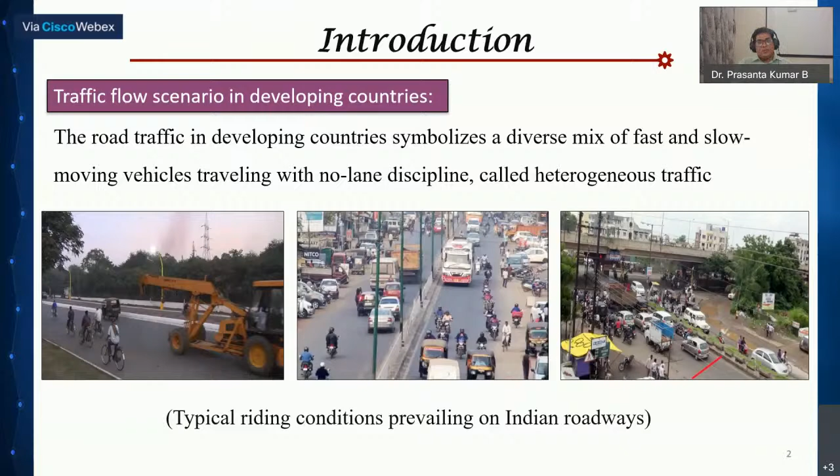So this way we will proceed one by one. The problem statement: all of you know that because of our highly heterogeneous traffic, and since we are not following lane discipline, the users, particularly the bicycle mode users, are being deprived—their service quality is not taken care of.

So we have to try to give some facility, but not at the cost of losing or decreasing any kind of service quality that the automobile mode is availing in the present scenario. That is something we should try, so that our non-motorized mode of transportation, which is a green mode, is very much required because of our lifestyle.

So there is some scope that we will get some physical exercise and at the same time less pollution. So we try to find what kind of service quality the infrastructure provides.

Again, the infrastructure are broadly of three types. One is urban street mid-block sections, one is signalized intersection, and another is unsignalized intersection. So broadly, three facilities we are considering.

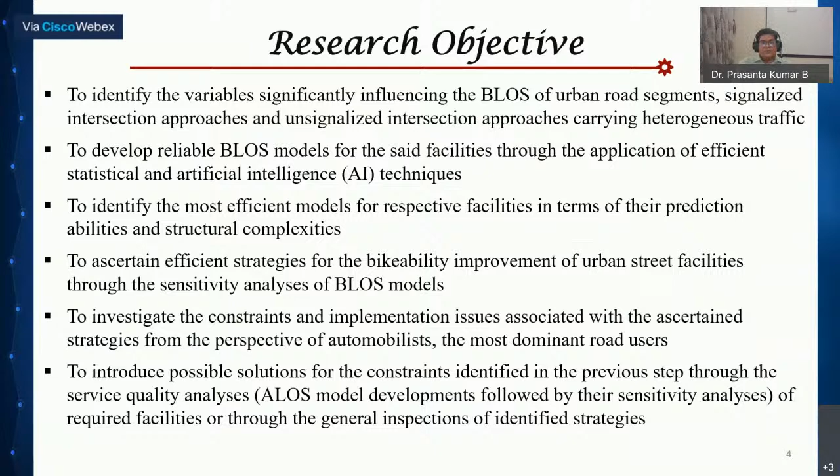Several cities are there, then we have to select some cities. Based on what criteria we are selecting some cities, what kind of variability—those things depend on us. We have to select the cities; it can be metropolitan cities or mid-sized cities, or in some case it can be mixed up. Then we have to judiciously take the decision from which city we should take the data.

Next level, we have to identify the variables, because there are several variables you can find from literature, and then finally we have to select some of the important variables. If you take too large a number of variables, it will become very difficult to manage in your modeling process. So that's why we have to apply some statistical technique and limit the number of variables to 5, 6, 7, whatever we can control, or variables having significant contribution.

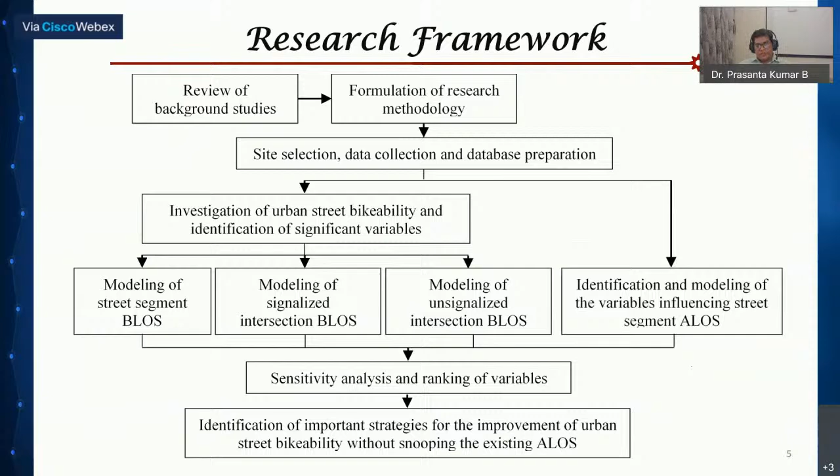Broadly, we are discussing two types of tools. One is statistical tools, under which stepwise regression, ordered probit, ordered logit. Then under artificial intelligence tools: genetic programming, multi-gene genetic programming, functional network, then BRNN—Bayesian regularization neural network. Many others are there, but we have discussed this much.

Some of the very popular techniques in the recent past—all these AI tools are being used in transportation problems, along with other statistical tools that are traditionally used. Then we will see which method or tool is giving better results. We can give some comparative statement or comparison, that we'll see.

So regarding the study area, in fact, collecting data in India is always very difficult. So we have taken data from several cities, considering different Indian cities, different parts of the city, then diversity in the geographical properties, traffic characteristics, and roadside developments. The purpose is to include much more diversification in their characteristics in terms of geometric, traffic, etc.

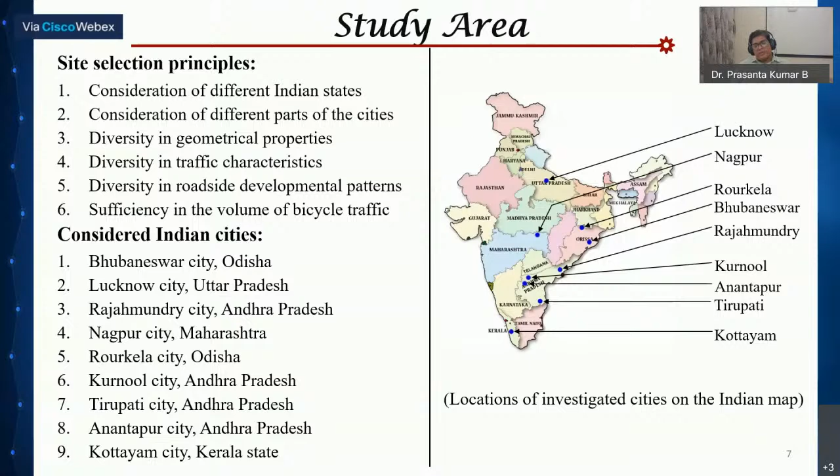Weather condition, and again, when you are an academic researcher, you have restricted time period on that particular time period, preferably on the working days, peak hours, data are being collected in different time periods.

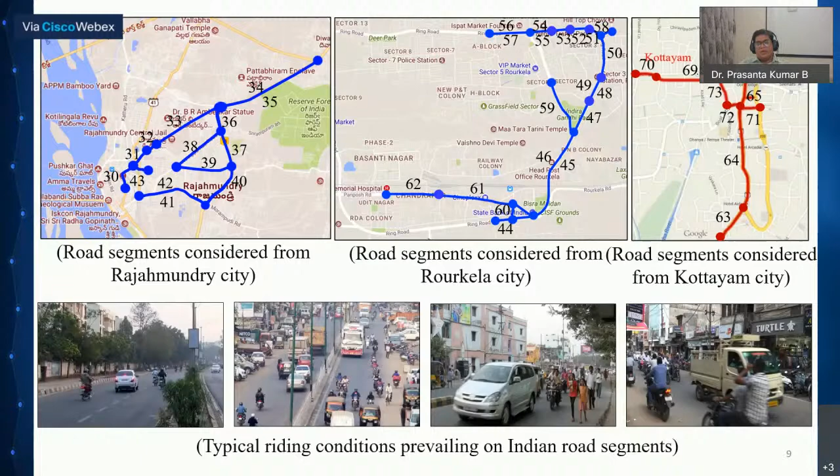And we require some high resolution video camera, measuring tape. Nowadays, you have different ways - without measuring tape, you can also measure the distance. Laser meters are there. And of course, through this video camera, you can get the traffic operational data, then geometric data we can measure using the measuring tape.

Similarly, the built environment and other data that we have to take from the field investigation, their perceived satisfaction level of the user. The users are, of course, your bicyclist or automobile users, depending on the mode on which we are collecting the data sets. This is another challenging aspect, getting perception of the users there in the field itself. That's why it is more accurate, because the users have their feeling, they express in the moment.

The other way, we can do the same thing through Google Form. We can send to several users, or there is another technique - we can take small video clips and display at some, say, AV hall or some common room where many other users, maybe your friends, can view them, so that you give them the questionnaires, and they go on filling the questionnaire, looking at the different video clips, in different ways. This perceived perception method is being applied elsewhere also.

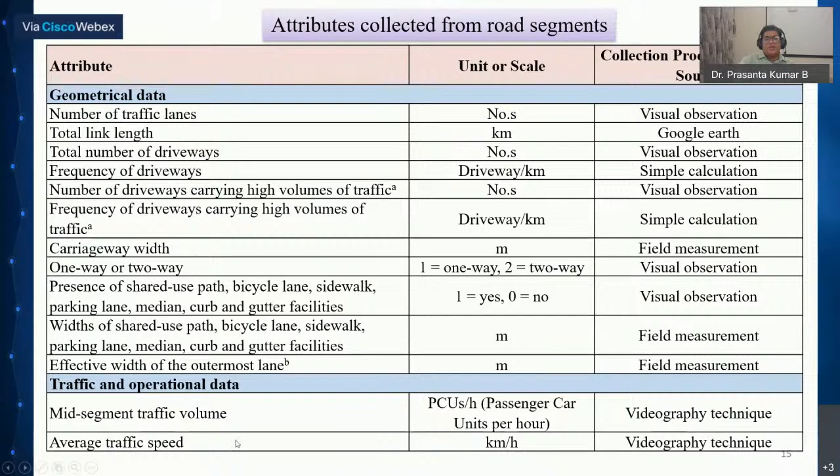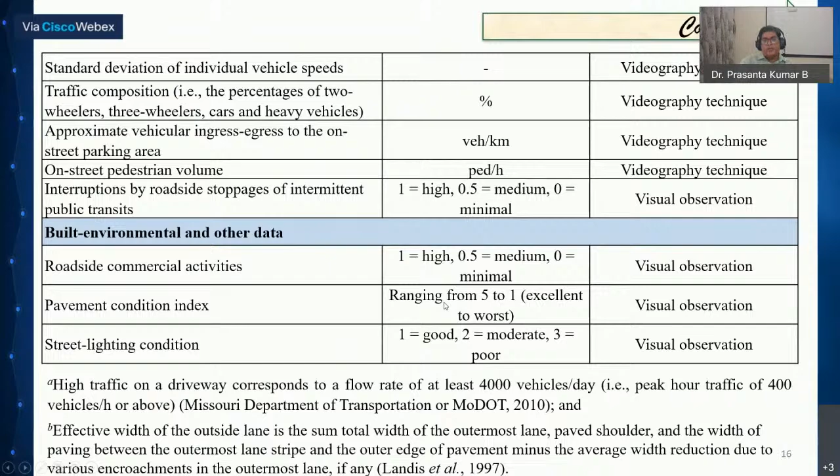Similarly, traffic operation data - mid-segment traffic volume, average traffic speed, standard deviation of vehicular speed, etc. Built environment data like roadside commercial activities, pavement condition index, street lighting, etc. So the data sets that are taken - how we have got these variables - of course literature helps, and when you are conducting the pilot survey, that is, first time survey, then you have got the first impression. Then only we can have our final questionnaire design, and those variables we have to measure in the field.

So likewise for signalized and unsignalized intersections, of course there will be some difference in the data variables - it is not the same. And this extensive data collection, variable selection, really strengthens our in-depth analysis.

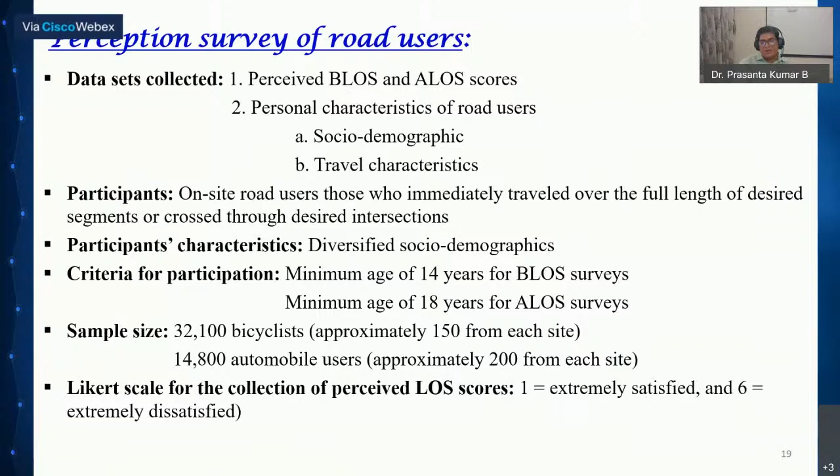And there is some erroneous form of data that we can eliminate. Sometimes we also take help of mirroring. If you are having very less data sets, there is some technique we can use to increase the data points, and the data points have to increase - I mean, has to be significant. So there are some techniques or mathematical expressions using which we can say whether our data sets have a good number of data points for the purpose or not. Statistically, we can satisfy that - very simple formulas are there.

Now we can proceed a little bit faster. This service quality - all of you know that on any facility, we are concentrating here on road facilities, particularly mid-block sections, signalized or unsignalized intersections, and some mode-wise facilities. For all different cases, this range will vary.

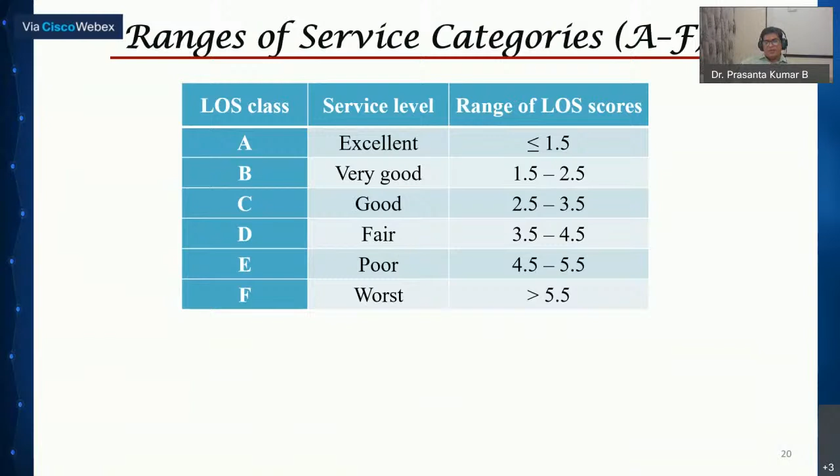Conventionally, this is taken as a variation from 1 to 6. Normally, A is the best quality of service, F is the very worst, not so good kind of service, and average is C. So for any infrastructure, we always try to maintain at least a C kind of service. Better would be B or A, but practically it is very difficult. In India, population density is very high, so that's why practically it may not be possible. But if the service quality is deteriorating, going towards D, E like that, then we try to take some action.

Road segments, that is from after one junction to next junction. Likewise, here for this bicycle level of service modeling, you have 8 variables. Initially it may be 15-20 variables. Because of this, using Spearman's test, correlation analysis, p-value analysis, all of you know, we can say which variable should be taken into consideration and which variable should not be. That is the first step of our modeling.

Now, data processing. All of you know that when you are developing some model, you have to validate it. So to validate your model, you keep some data aside, 30% of the total, that will be useful later on. So in most of the modeling cases, when you are using only 70% of the data, we require more data.

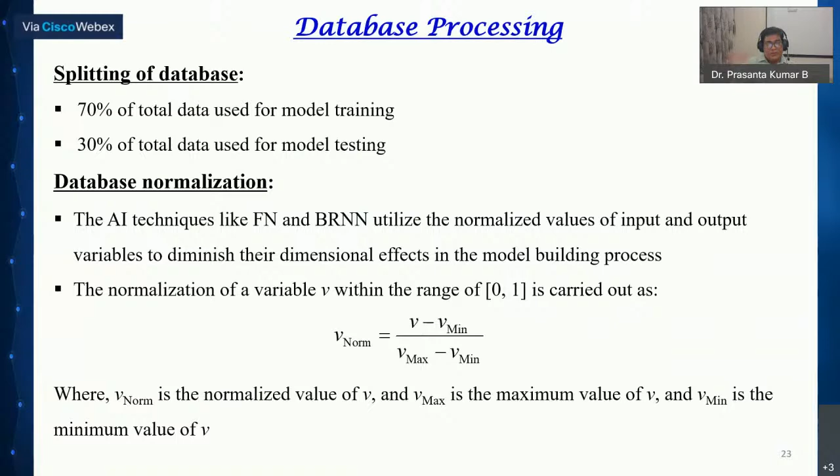This is our contribution, the modified rank index. All of you know that when doing some kind of modeling exercise, you apply some error estimation techniques. This is something called best fit calculation, R square value - this is what we have taken as R1. This is our contribution totally, called MRI, modified rank index method. Normally we see all these are available, then we try to combine them together and develop this MRI method.

R2 is error measuring using average absolute error and maximum absolute error methods - likewise, a well established method. Similarly R3, I'm not going into more depth, but you can have a look at it. And if you want to know more, you can email me - my email ID is there on top.

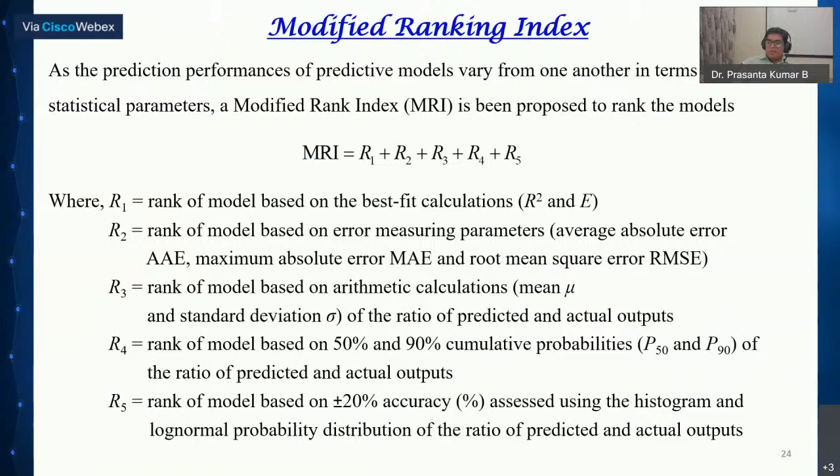R4, R5 - then what we do, suppose for regression based model, ordered probit model, ordered logit model - these are statistical techniques. Again you have GP, MGGP, FN, BRNN - 6, 7 methods - you have applied all these. Now, how can you know which method is better, or best, or worst? So then we do training and testing, 70%, 30%.

Then we try to find the best fit calculation, error measuring parameters R1, R2, R3, R4, likewise. Then in the first error estimation technique, suppose we have applied 7 methods. Based on those outputs, we can rank them - this is the best one, suppose the FN method using this error method. Similarly for the second error measuring method, in all these cases, I think it is the FN method.

So when all of them equal 1, 1, 1, 1, the summation is 5. That's why the functional network method is the best method in terms of error estimation. The second best is MGGP, multi-gene genetic programming method, and third is the genetic programming method.

You know that the regression method, which is so popular and most user friendly, we love to use those kinds of models. But in terms of prediction or error estimation, it is not performing so well. That's why people are going after these artificial intelligence or machine learning approaches.

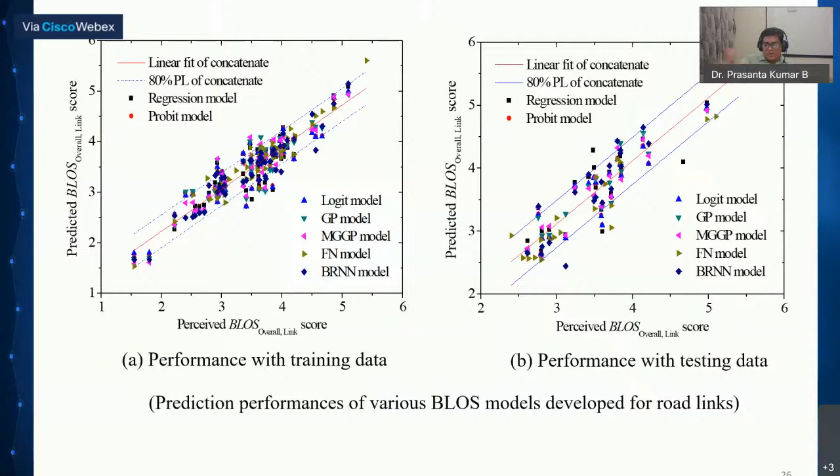Now the model fitting part, we have to fit our equation. Always the regression based equations are more popular. Under regression based methods, we have linear based and non-linear based equations we can develop. Our experience says that non-linear based models are difficult to establish, but they give much better prediction than linear models. The R square value you'll get is better, and you will get more appreciation in your research or paper. So we should try both, then only we can say which is giving better result.

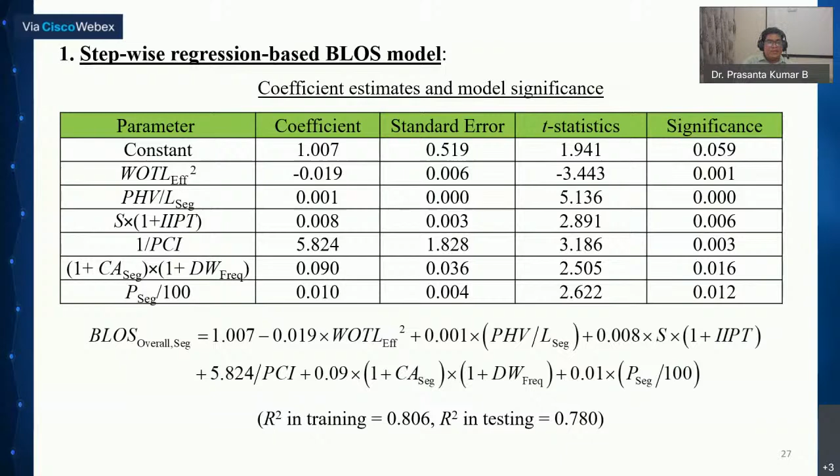For this, we have to do a lot of trial and error, but finally we get some good models. In similar form, this MGGP and so many other techniques are developed under MATLAB based computational techniques. Nowadays, some other techniques are also available. For that, we require this algorithm, population size—it has variation—this to this number of generations, etc.

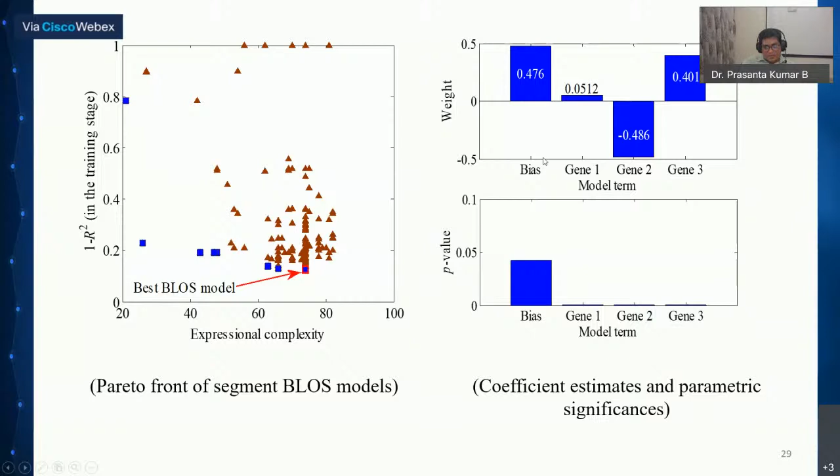So what finally we have followed here is these things. The important thing in this method is establishing the weightage. In our particular case, the number of genes can be decided, and that decision depends on the R square value where you are getting the maximum. Accordingly, we have selected 3, and the coefficients we have got are utilized here. Coefficient W0 is utilized here, and the remaining W1 weightage factor for gene 1, gene 2, weightage factor 3 for gene 3. These things have to be calculated.

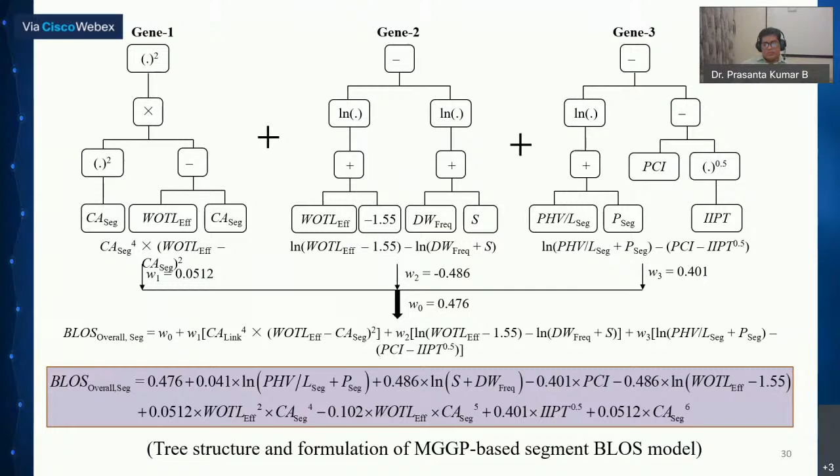And those calculated values are somewhere here, 0.041, 0.486, likewise. Of course, variables are ours only, depending on the type of problem we are tackling—transportation, mechanical, or whatever structure. Overall, this equation seems to be more complex. Any normal user in the field will fear to use your equation. Its prediction efficiency is very high, but the question mark is on usability, how the users take your model or output.

Similarly, this is the functional network based BLOS model. The shape function SF is being considered for polynomial, exponential, and other forms. In that case, the maximum R square value we found is about polynomial, and that is considered based on the variables we are considering. We are trying to establish some equation, and it is so complex.

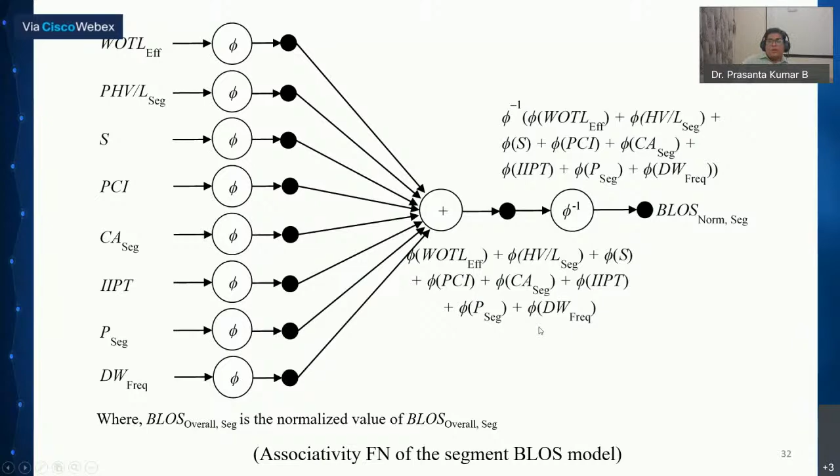So this is something about one mode of transportation. We are talking about bicycle. Under bicycle mode, we are considering mid-block or segment type, and other junction types. Similarly, we can develop such kind of very complex equations. Once you know the technique, now it is simple—like this automobile level of service model.

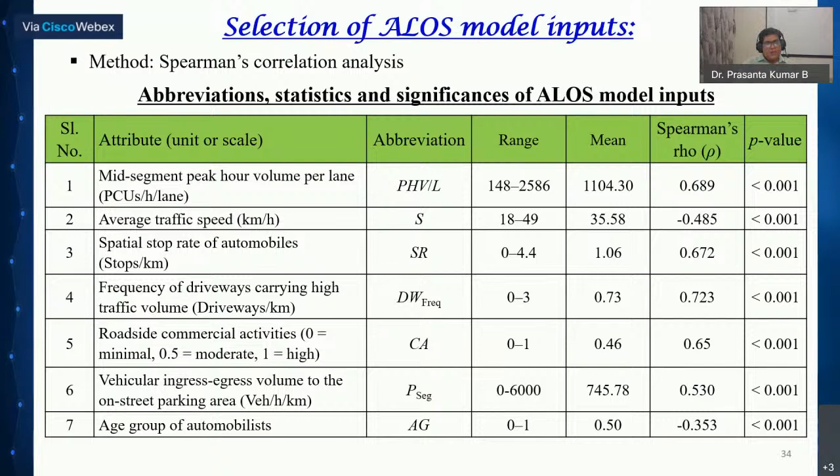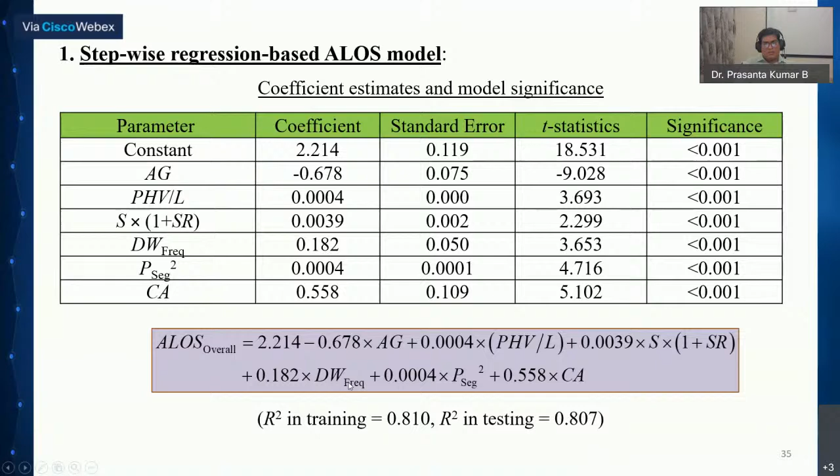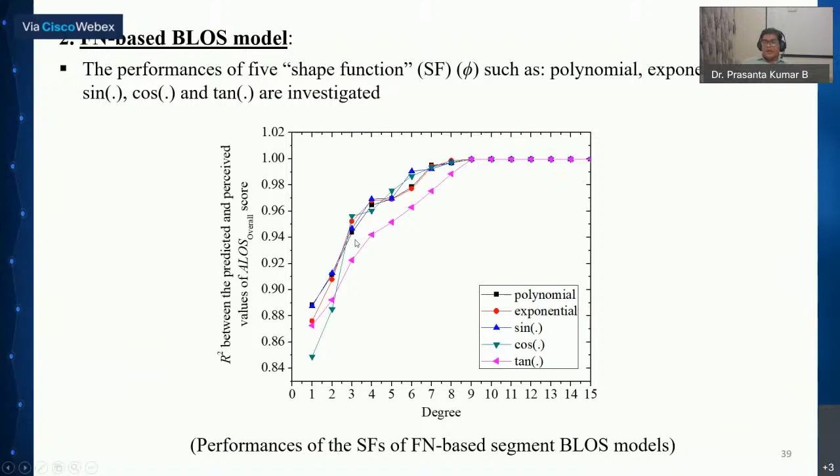I think things are mostly repetitive to what we discussed so far. Only thing is there will be some variation in the variables we are considering. Remaining, the equation looks a little bit different, but overall the approach is the same. Similarly, the MGGP LOS model, and the functional network based LOS model—our target in the beginning is to get, assess, or predict bicycle service quality.

The bicycle service quality here in India, whatever we are getting, is purely on shared path. Hardly will you find any bicycle lane facility. In some Western countries, you will find exclusive bicycle lanes. Some pedestrian lanes are there. Sometimes unwanted bicyclists use pedestrian paths, but that is a separate issue. And whatever we have done here is purely on shared path.

The shared path—if you see the lane-wise utilization, the innermost lanes are normally utilized by high speed vehicles, preferably car traffic. Next to that is heavy vehicles, truck traffic, bus, etc. And the outermost lane, or we say curb lane.

Close to our footpath, you will find much hindrance from vendors, encroachments - our Indian scenario - stray dogs, signboards, advertisement boards. So the vehicle normally travels at slow speed, and on that, bicyclists share the space, and that's why we have considered that as the case.

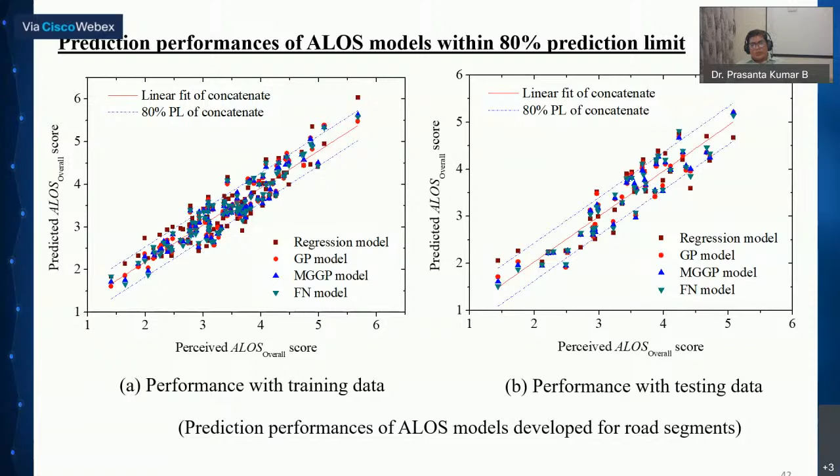Similarly in this case, for ALOS model we try to find the error - regression based, MGGP, and FN - depending on how many models we are developing and comparing. Here, perhaps MGGP is showing better results.

So the question now is, when developing such a model, we have to check its prediction efficiency. How can we check this? One is our own model - again, models are of different types we have developed.

In that model there are many types of variables. If you give those variable values as input, you get the output. That output is some score, and you can define its ranges as A, B, C, D, F - so finally you get this A, B, C, D, F, Likert scale 1 to 6.

I know these alphanumeric values show where we stand at the present scenario, field observation, and our model prediction. Both we are trying to match them. The question is how to know the field observation.

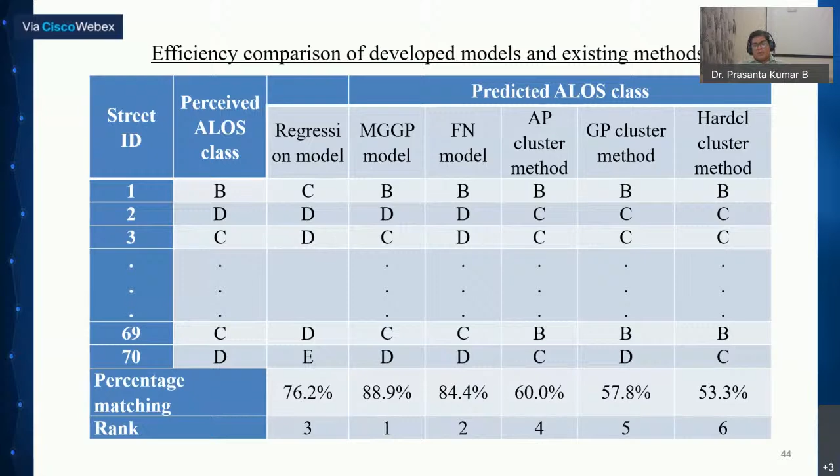Now this is perhaps close to the last part of our discussion: sensitivity analysis. This summarizes the whole modeling process we have discussed. We have taken some variables, restricted some, eliminated some through statistical tests. Once we take some variables, we try to fit an equation or model.

Once you have several models, you go through training and testing phases. Then the model is fitted, and we can check the observed versus predicted values - how much they are matching or not. Then once you know which model is best for you, say for any kind of facility -

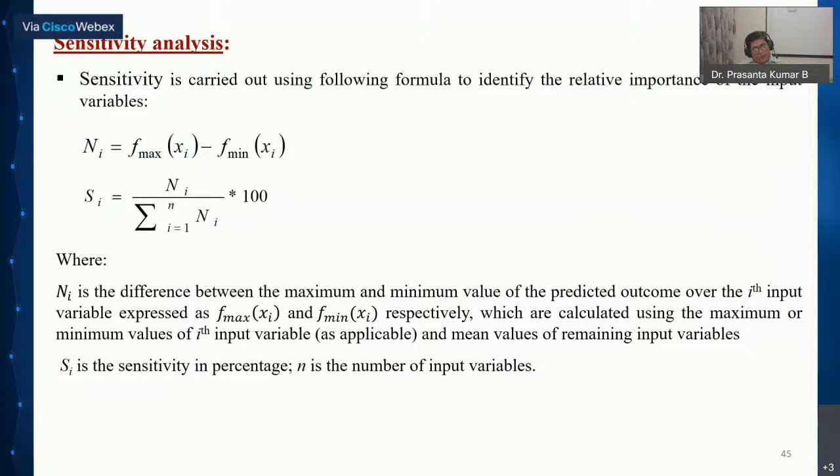maybe segment, signalized, or unsignalized facility - then our job is to know further through sensitivity analysis, because the number of variables are already fixed. Among those, we have to see which variable is contributing the maximum.

No, in this case it is 100 - it should be 100. In the previous case, when you're eliminating some variables, there will be a little bit of difference.

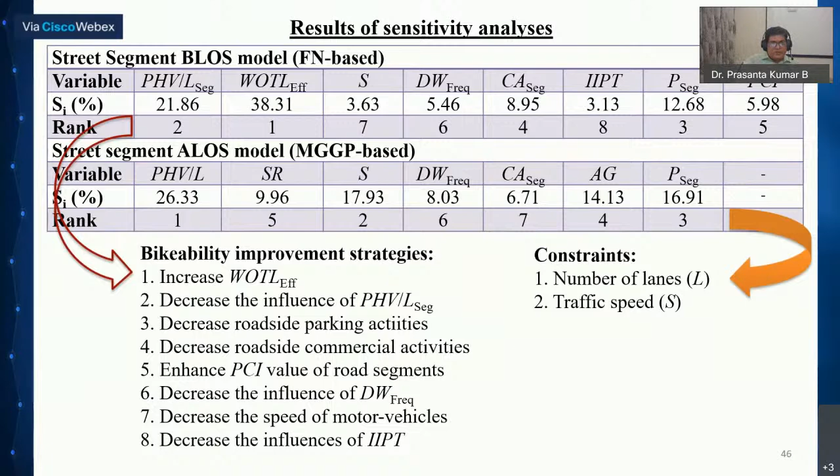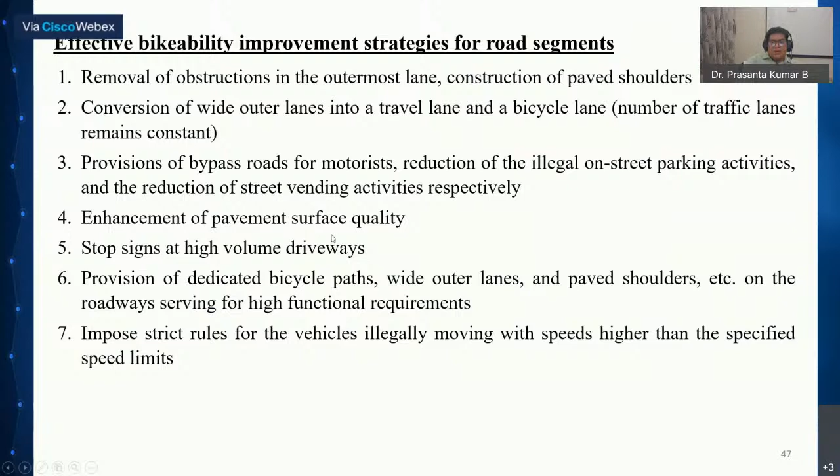These are the effective bikeability improvement strategies. We can look at the literature to see how we can express those things: removal of obstruction in the outermost lane, conversion of wide outer lane into travel lane, provision of bypass road for motorists, enhancement of pavement surface quality, stop signs at high volume driveways, etc. These kind of strong recommendations we can give.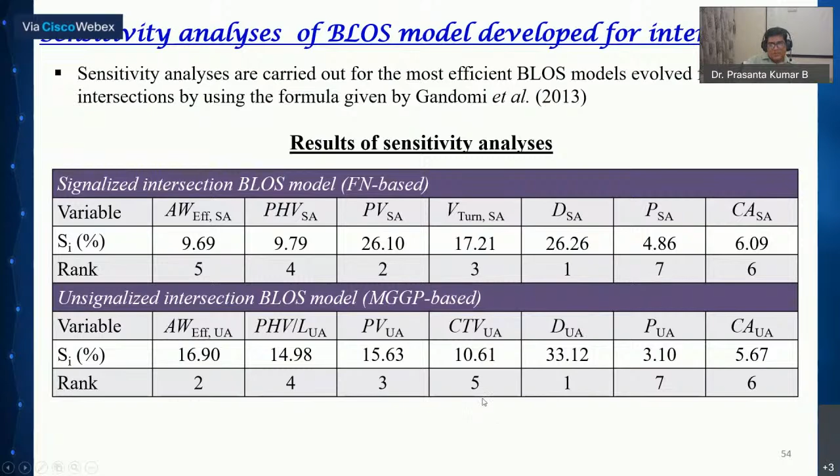This is all about junctions. These are simply repetitive things, we can have a look. Again, sensitivity analysis for junctions, we can see which one is influencing the maximum, and yeah, the variables are different.

Then we can say improvement strategies like the other facility. Here also, for signalized as well as unsignalized intersections, we can do something. In some cases, minimization of bicycle delay, that's the step we can take here: effective traffic management, proper signal coordination, separate bicycle signals. Most of the cases we don't find bicycle signals, minimization of influence from crossing pedestrians, turning vehicles, traffic flows, and the subject approach, etc. So we can do something.

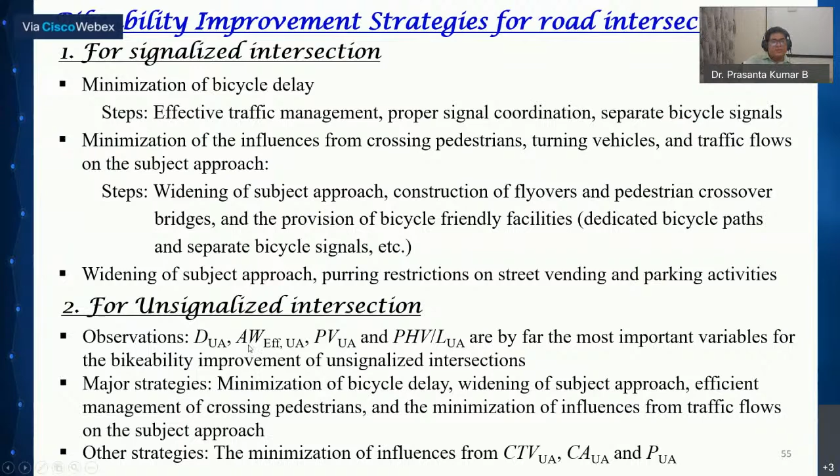So in summary, what we have discussed: the data sets have to be sufficient, with wide variation from different cities, different geometry conditions, traffic conditions, and that is better—your model becomes stronger. This is one difficult part in India. We have less automated data collection systems. We are reluctant to share our data sets, but still there is a lot of scope we can do on data automation and implementation. In fact, sometimes we are reluctant, but that way the research quality, the output, data quality will enhance significantly.

The tools, whether it's a regression based tool or AI based tool, all are available. The only thing is that we have to go forward and apply them. Perhaps India is very good in applying all these tools. So the only difficulty so far is about quality data sets and sharing of information or data sets. Then the whole thing will become very good for us. Now, of course, another difficulty is about application—how quickly you are applying your research output.

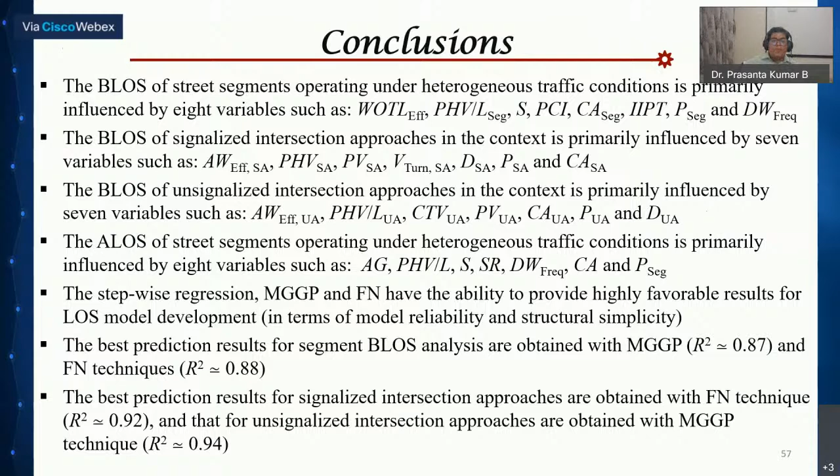Now, conclusions are complex, and for B-LOS, some variables which are contributing or influencing significantly at signalized mid-block sections are identified. Similarly, for A-LOS, variables are identified, different techniques are applied which give the maximum R-square value, and those things are also identified. So we can strongly say this MGGP based model is good for B-LOS prediction, say for segments like that. And improvement strategies we have in our hand, so we can go accordingly—that will give you the best result from the research, meticulous research with so much time.

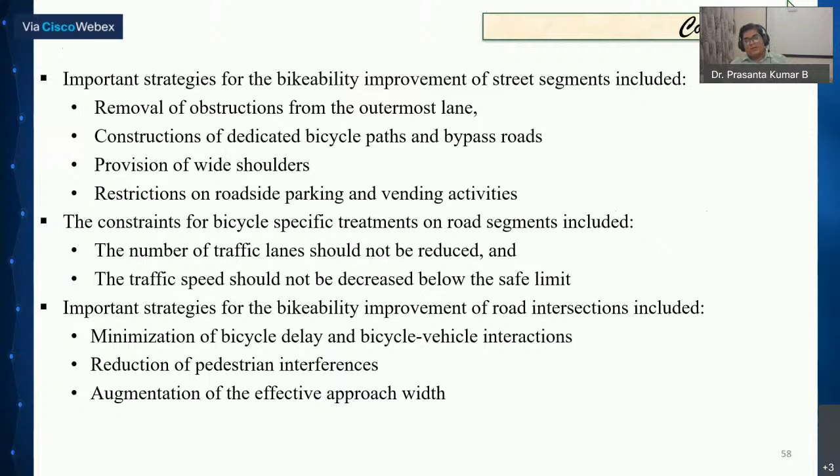I mean, others—ours is a developing country, so research is definitely a costly affair. Of course, over time, we are spending more and more money on this. And so we hope our road system, traffic management, which has an implication in transportation planning, and not only planning but also in the maintenance systems—because maintenance systems are also very much linked with our traffic flow.

So the whole exercise of doing this is only to have a very good, high quality road system, transportation mobility system, very good information system to the end users, so that we can optimally use our resources and get the best service quality. That's why we are estimating the service quality, we are predicting the service quality.

So the service quality concept is well established in the US. They started in 1950 in the form of the Highway Capacity Manual, and in India recently we have our Indo-HCM, but we have a long way to go—very extensive, comprehensive capacity manuals, service quality manuals, and all these things.

We should not only do it once, but at intervals we should include more and more latest techniques, so that our system will be much better. So thank you for listening very patiently, and perhaps this topic is interesting for all of us, so that way I stop here.

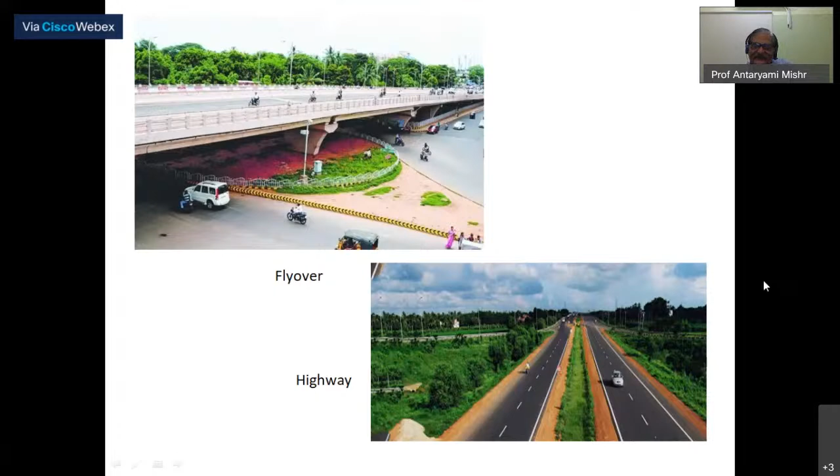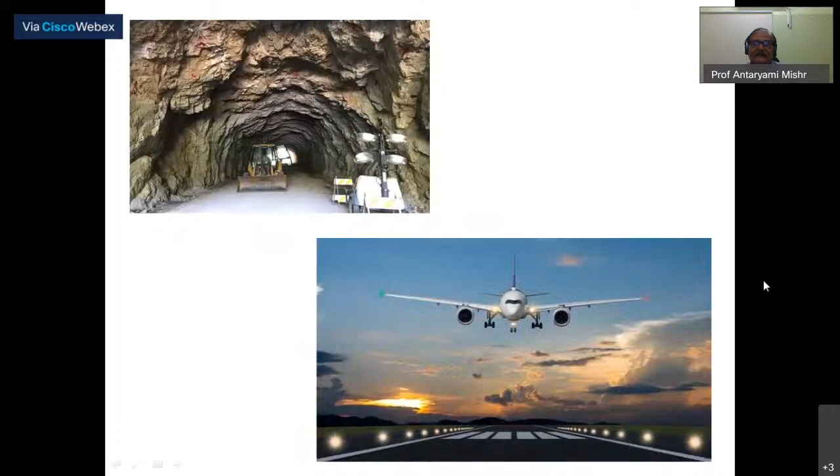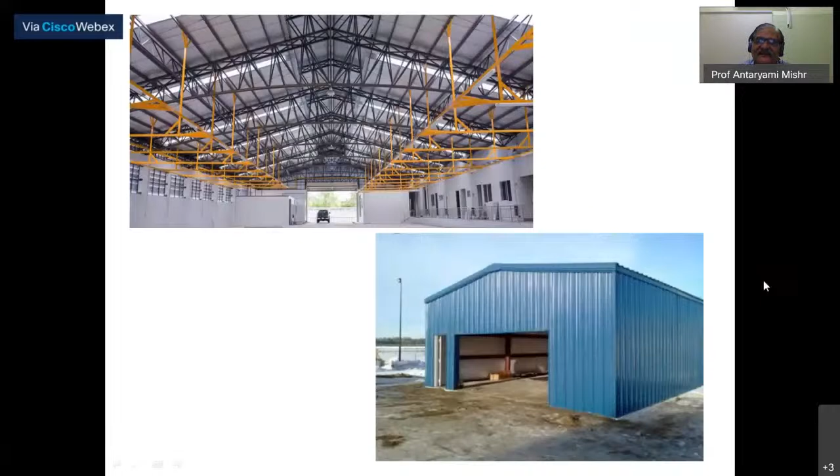And this is a roof truss, which has been designed for providing industrial sheds. And the last one I have shown is a ready-made house. You might have seen that the Tata group of companies are now providing vending zones, small shops, and also habitable houses, some small cabins, on a ready-made basis. It's available, and you will find that a house is being made within 2 days, or maybe sometimes within 1 day, and that is because of automation.

I mean to say, I can say jokingly that the robot becomes a second wife. If you are married, fine, it becomes a second wife. If you are not married, then it becomes your wife, who will give you a steaming cup of tea in the morning after getting up from bed.

All of you understand that this type of work is done through manual labor, which takes considerable time, including transportation and other things. Hard labor is necessary, and safety is not taken into consideration. This is the traditional way we construct houses. But it is still in use in our rural areas and also in our urban areas in India. We have not completely eradicated this.

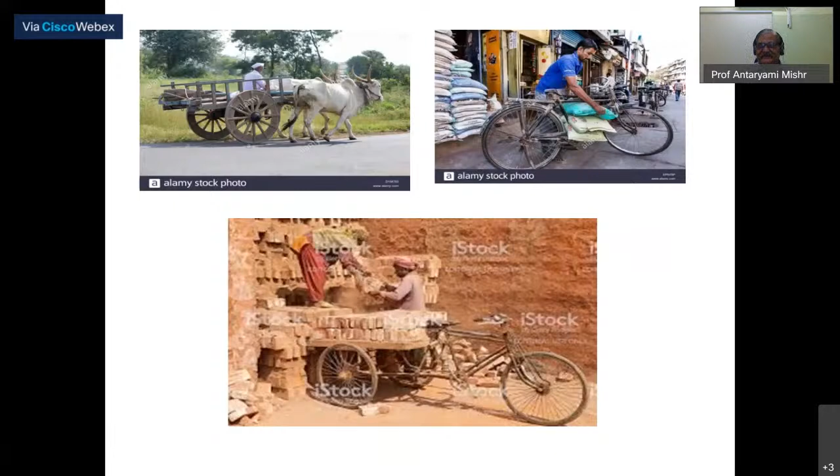We have utilized all those traditional ways and we are still using them in rural, urban, and semi-urban areas. But automation is necessary because when the job is totally repetitive in nature, it is too time consuming and dangerous. If you are working on a skyscraper, you have to climb up to 100 or 200 feet. If it is a 21 story building, maybe 200 feet. If it is a 10 story building, around 100 feet or so. So the working environment becomes dangerous.

As a result, safety of workers is not taken into consideration. Similarly, cost control: I have already given you the example of laying railway tracks, and reasons may be plenty, but there is no control on the cost overrun. Increased efficiency is necessary, and the construction industry is not an exception to this. So the excellent solution for this is that operational efficiency has to be increased and cost has to be controlled.

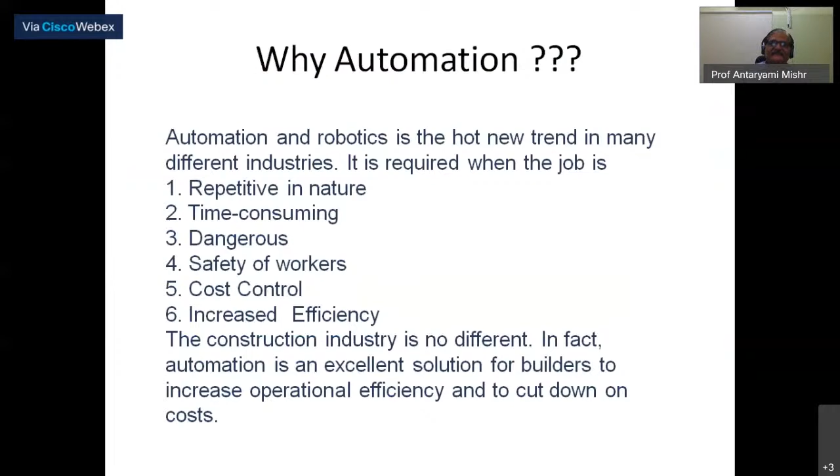Need for construction automation and its benefits: the scope of construction automation is wide and involves the entire construction stages. For instance, construction materials for civil engineering include sand, asphalt, aggregates, cement, water, and iron as a reinforcing agent, or if it is a composite material, other fibers and reinforcing agents are essential. So construction material production - how rapidly can we produce it, that's why automation is necessary, and how accurately can you produce it.

Sometimes prefabrication of construction components is also necessary. You might have seen nowadays that pre-stressed concrete or precast concrete is available, due to which it takes less time for constructing a flyover, a bridge, or laying down railway tracks. On-site construction is also very important, and so many challenges are there in on-site construction.

And operation - after construction, people forget the operation and maintenance of buildings. Last but not the least is the demolition and recycling of structures. For demolishing a single-story building of 2 to 3 rooms, we may take 1 month, but nowadays it is becoming easier because of the equipment available. But after that, how do we recycle these things? Otherwise there will be environmental impact. That's why automation is necessary.

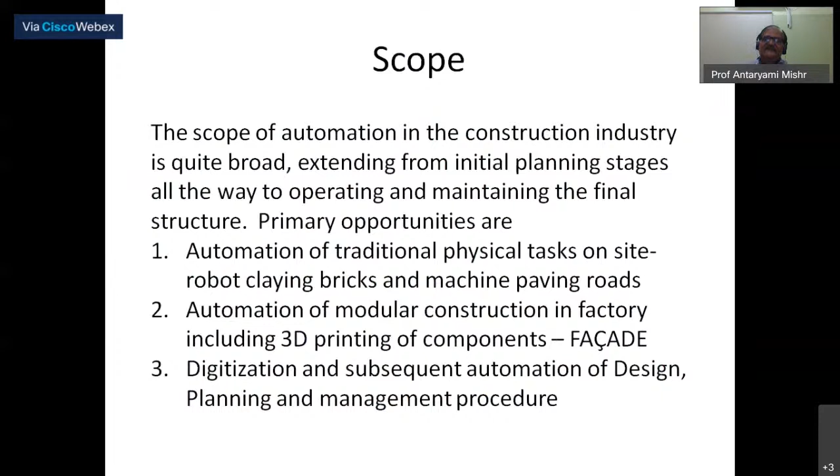Earlier, we would do the survey and then create a contour map to see at different heights whether the road was leveled or not, or where to construct a road. That traditional way took considerable time. But now people are doing it with drone cameras, which are also used in defense, military activities, research, and other fields. So what is the Indian scenario?

In the Indian scenario, our Honorable Prime Minister talks about Make in India and smart cities. Around 2016, he declared that 100 cities would be designated as smart cities. In Odisha, there are two: Bhubaneswar and Rourkela. These are assets for economic growth as far as infrastructural projects are concerned.

Under the Make in India scheme, $650 billion investment has been made for the infrastructure sector alone. Urban infrastructure is inadequate to meet the demands of the existing urban population, because there is migration of people from rural to urban areas. Most people are interested in migrating to a city, whether from Dhenkanal, Kalahandi, Baleshwar, Berhampur, or even Puri to Bhubaneswar. Everyone wants to stay in the capital city, which is otherwise a smart city, so they get all facilities.

But I remember that when Dr. APJ Abdul Kalam was President of India, he talked about the PURA scheme, Providing Urban Amenities in Rural Areas. That scheme was meant to develop infrastructure in rural areas so we can check the regional imbalances of east, west, north, and south India, and provide all facilities at the doorstep in rural areas as well. What facilities are available in urban areas?

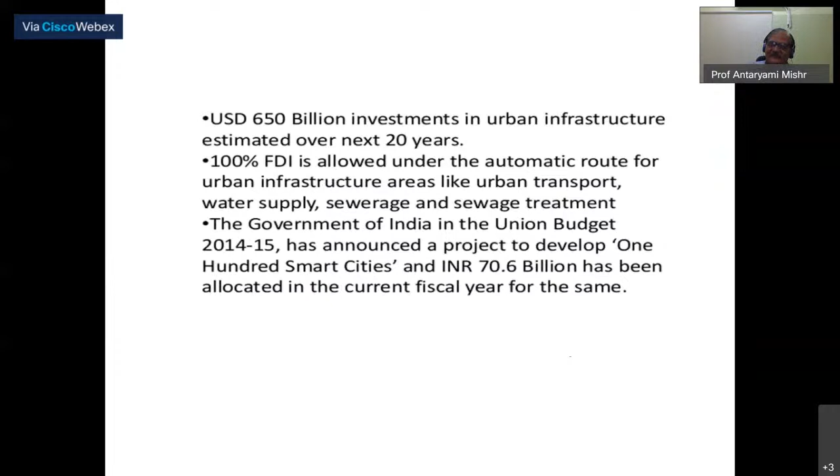So what are the areas of automation in construction? Those are roads and runways, structures, building construction, ports, tunnels, factories, and industries. Engineering automation starts from survey automation, design automation, construction automation. In construction automation, there is inspection, position automation, site monitoring, and machine automation. These are the 4 steps in construction.

Usually in automation, survey automation, that I have already given you the example. Now people are talking about survey with the help of drones.

But apart from that, now the concept has come to adapt virtual reality and augmented reality. Virtual reality is the simulation of a real-time situation, or what is happening in the field, so that prior to its execution, you can see what hurdles you are going to face and you can eradicate it.

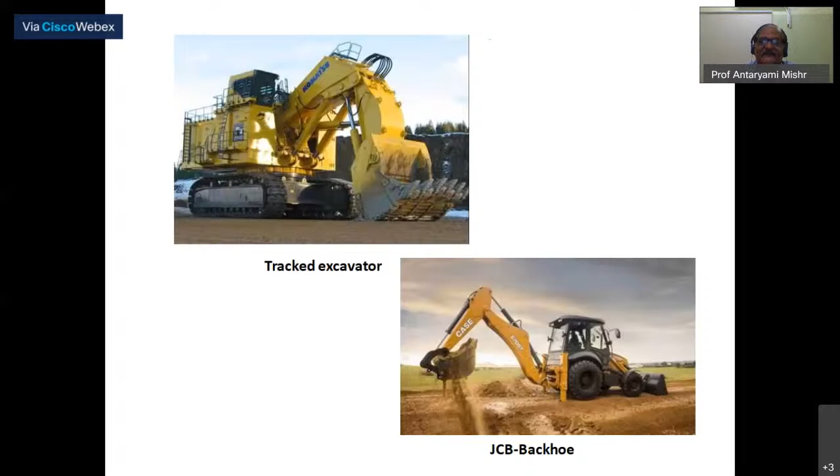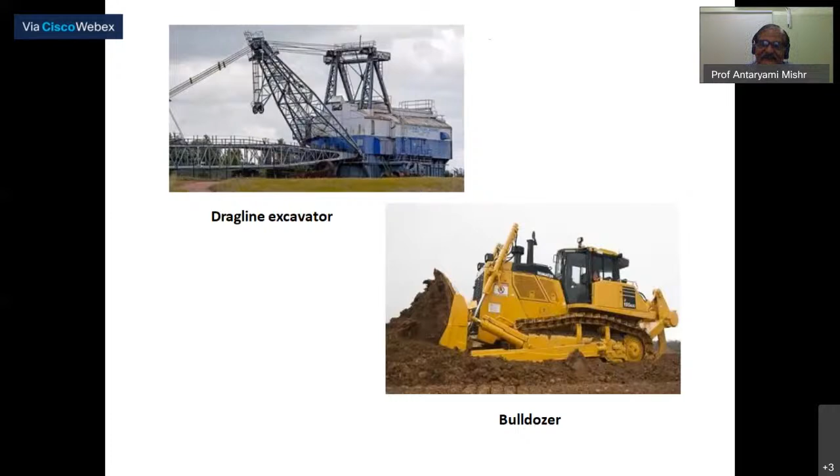See, there is a tracked excavator and a JCB which is a backhoe - how it works you can see from the pictures. Dragline excavators are mostly used in collieries and coal handling plants and others. Bulldozers - all of us have seen how they work. Motor graders are also available, as you can see from the picture. Wheel tractor scrapers are also available for scraping purposes.

Especially the earthwork or preliminary work that has to be done before making a road or construction of a building or anything, wheeled trenchers are nowadays available, so long trenches with specified depth can be made.

And tower cranes are used. Those who have visited Bombay, Mumbai, Delhi, or Calcutta, Madras, they might have seen tower cranes are mostly used in multi-story buildings.

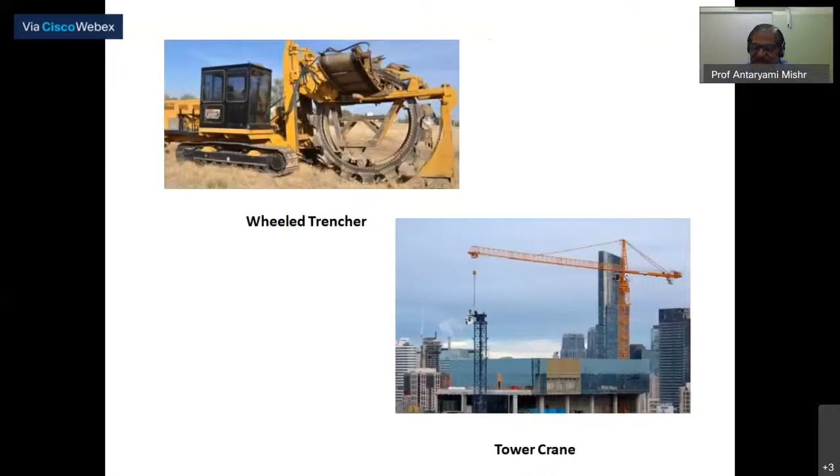And smooth wheel compactors that I have shown you, it is used. Feller bunchers, a lot of road materials can be taken as a bunch and kept as material handling equipment.

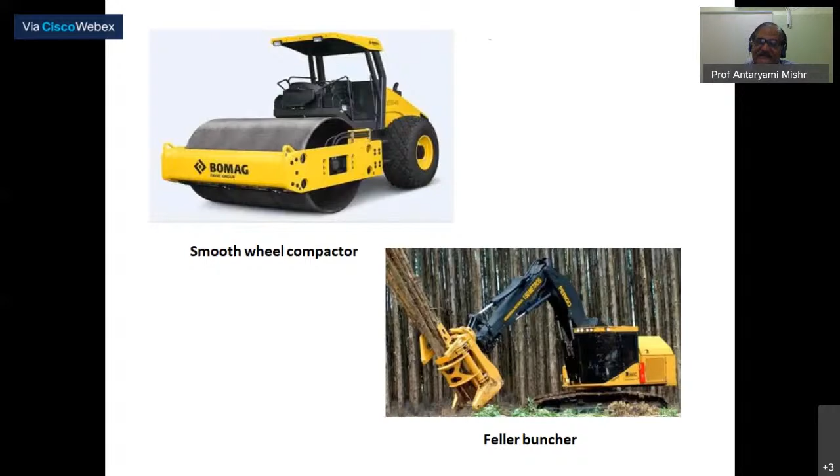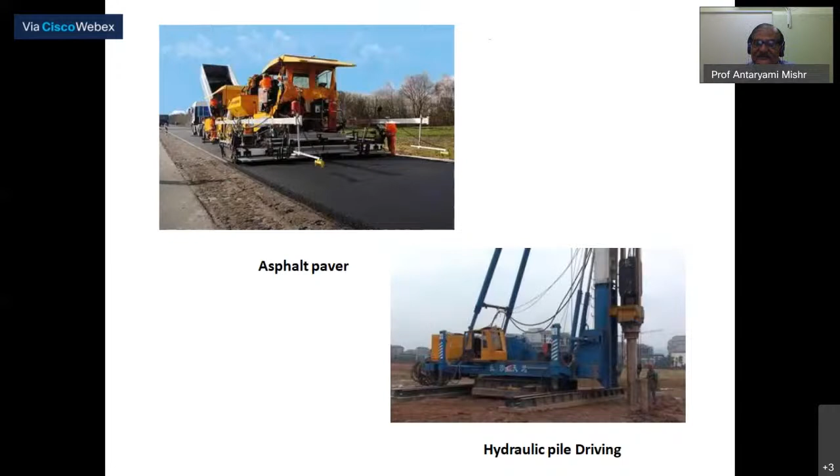And pile boring machine, I am showing you, these are used now, because from traditional way we are entering gradually to non-traditional way of doing things at a faster rate and with a good quality.

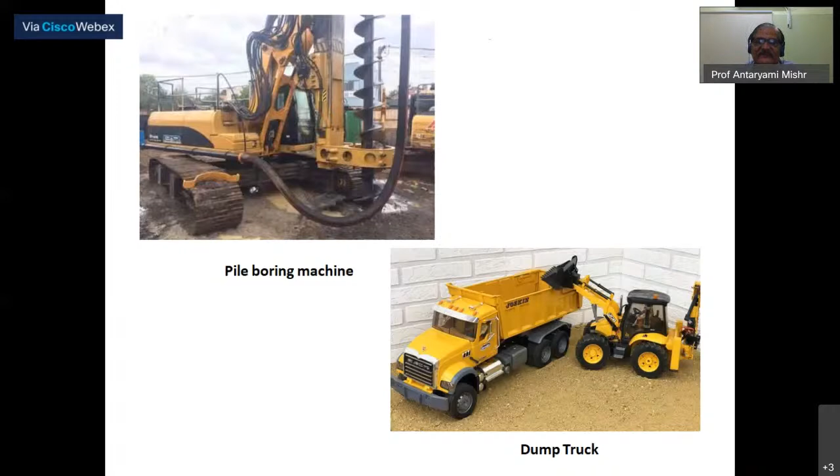Now grinders are available which are quite portable, can be taken to the field and it cuts within less time so that quickly things can be done.

And hydraulic drilling machines are available, deep holes and other things can be done. It can be transported from one place to another, it can run, and that's what I'm showing you.

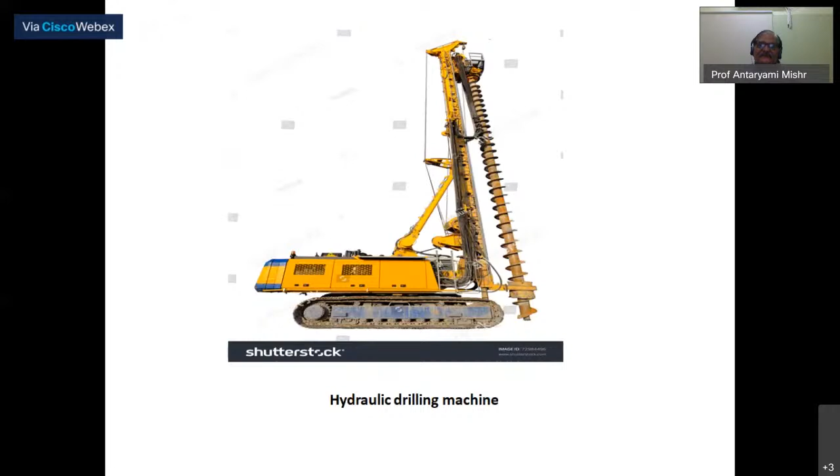And the mixing plant, ready-made mobile mixing plants, I have shown you in the bottom picture. And the top picture you will see the mixing plant for making mortar, sand, chips and cement, water. After mixing it thoroughly, you can mix it.

It is either done by hand earlier, nowadays it is motorized. And ready-made mixing plants are there with huge capacity, and then dumping from one place to the other, mobile mixing plants are made. These are ready mixing plants, we call it in civil engineering.

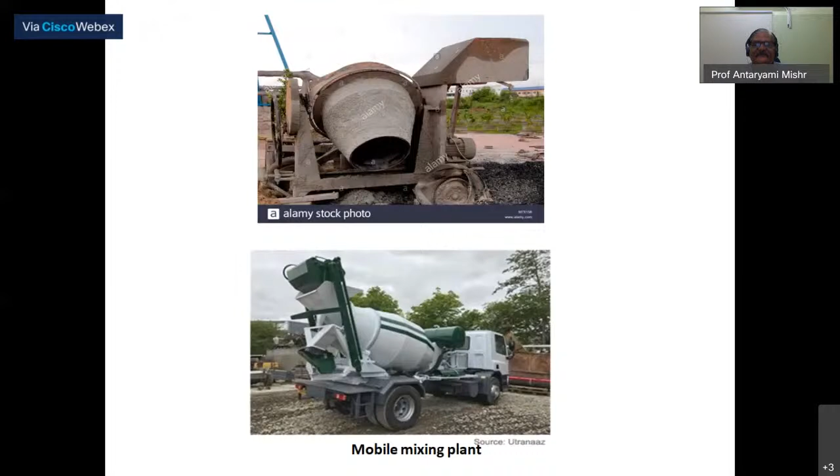And digital construction laboratory you might have seen. I do not know, digital construction laboratory is yet to come even in IITs. Engineering colleges, they don't have digital construction laboratory where a robot arm is there and robotics system is there, so that you can visualize things in a better way. And it is quite helpful for future engineers.

So wheel loaders, and they're used in construction industry that I have shown you, crane and road rollers. These are conventional things. Finally, I have given you one Hadrian.

This Hadrian is a fully automated machine which can erect the brick frame of a house in merely 2 days. Imagine.

We take minimum for a single-story building with 3 to 4 rooms, minimum 30 days, or sometimes it is after making a plinth protection, going from foundation, then plinth protection, then to the lintel level, from lintel level to the roof level. So we take considerable amount of time.

This Hadrian is a robot which can work 24 hours a day, continuously, and the lengthy process of building a home with human capabilities will be reduced to a few weeks. This has been developed by Fastbrick Robotics. It is able to lay 1,000 bricks an hour with potential to raise 150 dwellings a year.

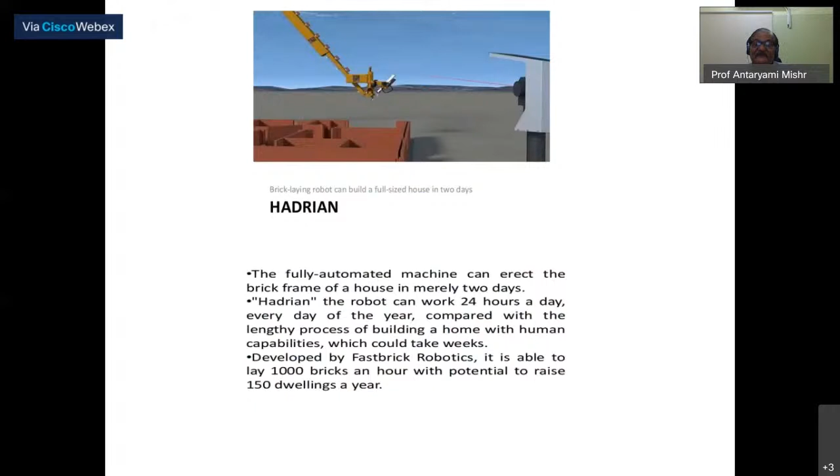Imagine this is the level of automation that we are thinking of. And from the 3D computer design of a house structure, the machine will be directed to load, cut, route, and place the brick in sequence using a 28-meter telescopic boom. 28 meters means around, multiplied by 3.3, means around 90 feet or 100 feet.

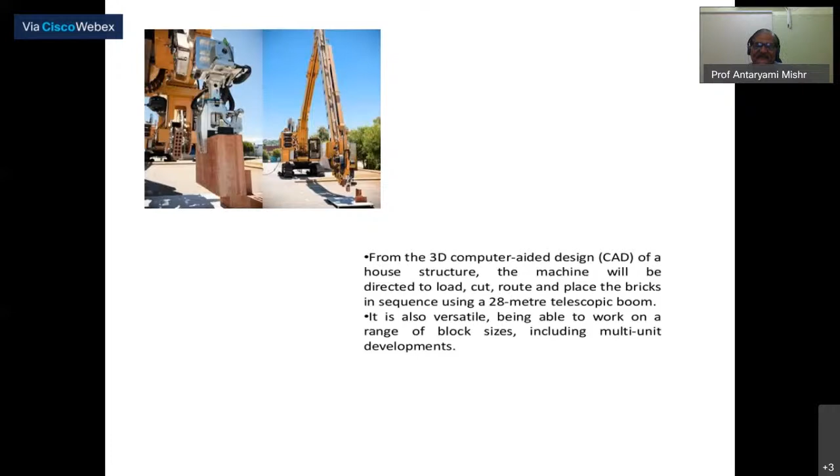It is also versatile and work on a range of block sizes including multi-unit developments. Telescopic boom also handles 0 to 300 millimeter concrete slab and places material from sand to rock with 100 millimeter aggregate size. 100 millimeter aggregate size is quite high, but it can handle.

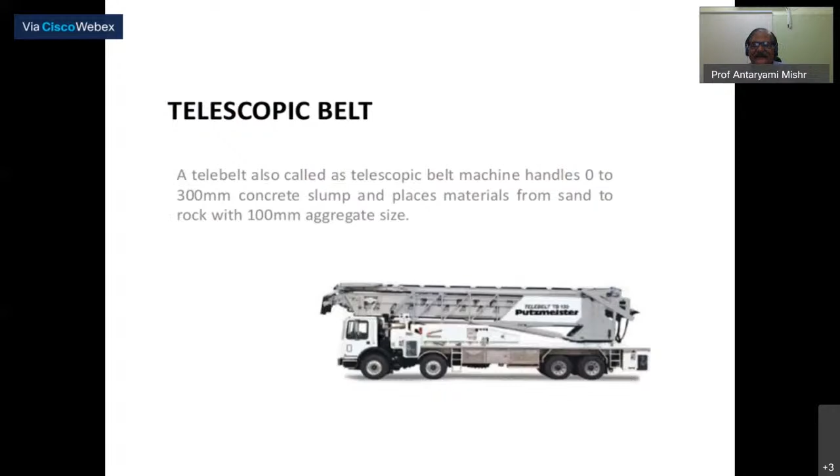Telebelt is the best solution for large construction where long reach and high volume placing is required, such as dams, foundations and footings, bridge decks, tilt-up and outdoor slabs, mat pours, etc.

I am not interested in discussing the design because it will be too boring for you. It has got 5 sections telescopic boom, base steel section of 4 telescopic high strength yet lightweight aluminum sections. Telescoping boom reduces problems with obstacles and saves labor and time.

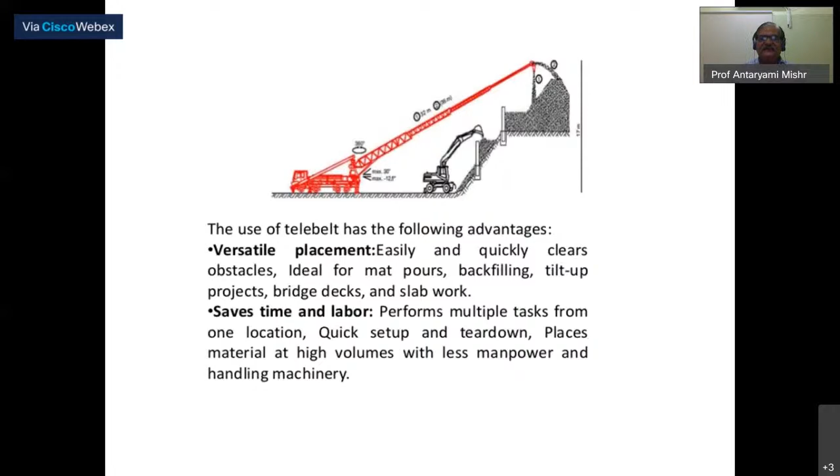This is a versatile placement, it clears obstacles and saves time and labor that I have already discussed. I have shown you how it works in a figure, and these are certain advantages which have already been discussed.

Difficult physical work can be taken up by automation, where automation and robotics do jobs much more easily. It increases efficiency. So countries such as Japan and Germany have improved their living standard and gross income that I was discussing with you. Gross domestic product becomes your gross income, and living standard has increased, per capita income has increased, because of employing automation and robotics. Japan and Germany are far ahead of India.

And the work environment becomes quite conducive for the workers because they will be distanced from uncomfortable work positions. Certain examples - I have got 5 things which I discussed in the beginning while summarizing my talk.

Autonomous machines, drones to survey working areas and employees - surveying employees is another factor, that is a man management thing. Drones are there. CCTV cameras are now becoming mandatory for hotels and other places. Similarly, while doing the survey or managing the workforce and including officers on the site, drones are being placed, and robotics in concrete works also.

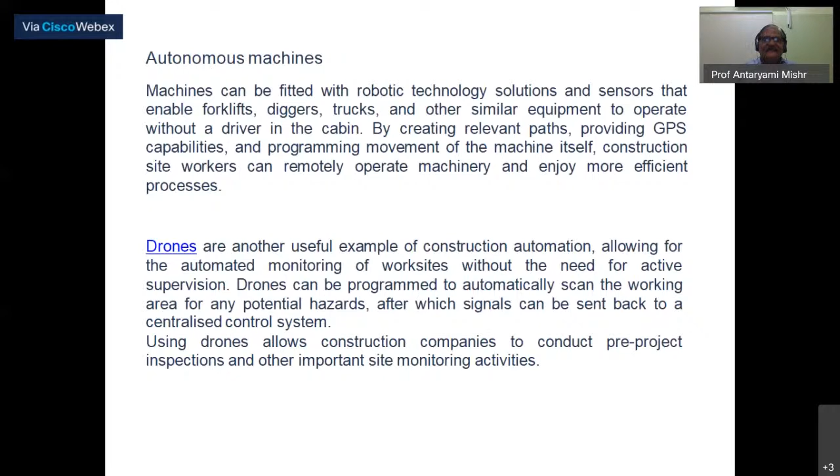Robotics in concrete works - mixing of concrete, control systems, laying cement floors, removing the surface from water, finishing, surface finishing, and ready mixed concrete products. They will take very less time if you are using robotics.

Another area of concrete work benefiting from automation is floor polishing. Programmable machines are being used to polish soft concrete in both commercial as well as residential structures. This can be programmed to pour and level concrete in the right portions while avoiding obstacles near the work zone.

Demolition robots are also now available to bring down walls and dismantle concrete slabs very quickly. Today, while coming to the office near Bhubaneswar from my residence, yesterday I saw two big columns for a flyover, and today I see that those are not existing - they have been dismantled very quickly using automated processes within a day. So this is a safer working environment for employees if you adopt automation.

IoT sensors to collect and process data - this gives real-time readings of location, temperature, pressure, and other environmental conditions. It will transmit signals to trigger a specific action. For example, in welding or fabrication, these sensors will collect important environmental data from the field.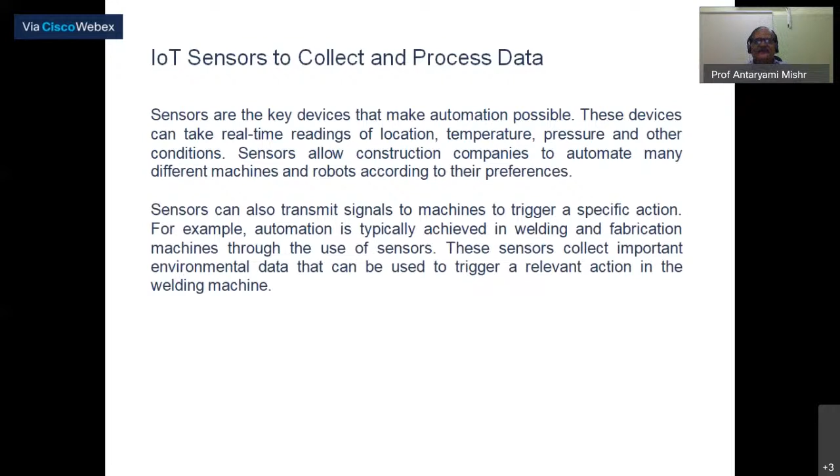We have told all engineering colleges to go for virtual reality and augmented reality labs, so that our future engineers, because they have to live with this, the future skills we are planning or giving training to faculty members as well as students is mostly on Internet of Things, artificial intelligence, machine learning, cyber security, virtual reality, data science, blockchain technology, robotics, and so on. Why? Because we are heading towards that. India is a largely populated country, so in order to improve and develop our infrastructure for a better economic situation, we have to enter into this.

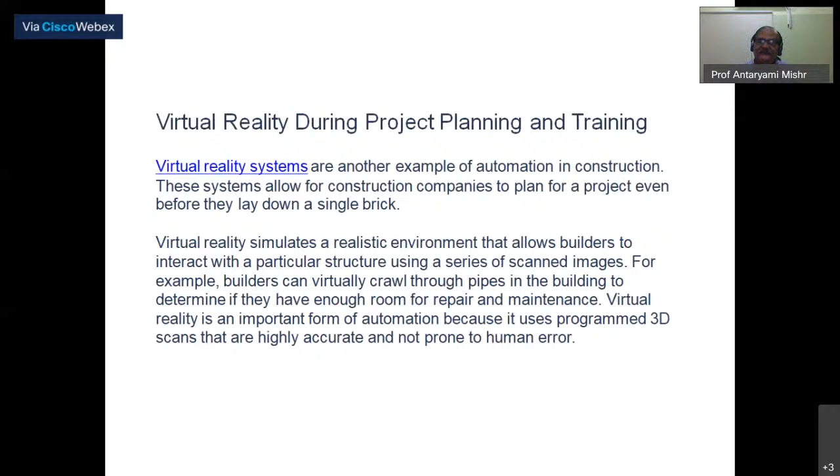Automated construction sector, precast concrete industry - automation is possible by using robots, for prefabrication of masonry, on-site masonry construction, and in timber construction also. In construction nowadays, for interior and exterior decoration, we are using timber, plywood, composite materials or even plastics, so we have to think of robotics in this area. Apart from that, we cannot forget traditional civil engineering materials like steel or aluminum. I am now showing you some pictures of how robots are working for making a boundary wall, or making a wall after making the trench.

100% it is not possible. For cement, steel, glass, aluminum and wood work that you are doing, it is necessary that we should go for 100%, but at present we have not even achieved 50%. Partial automation robotics is also used in road construction, tunneling and earthworks. Regarding concrete precast component production, a large degree of automation is utilized, and the necessary number of precast components can be produced as per buyer's demand.

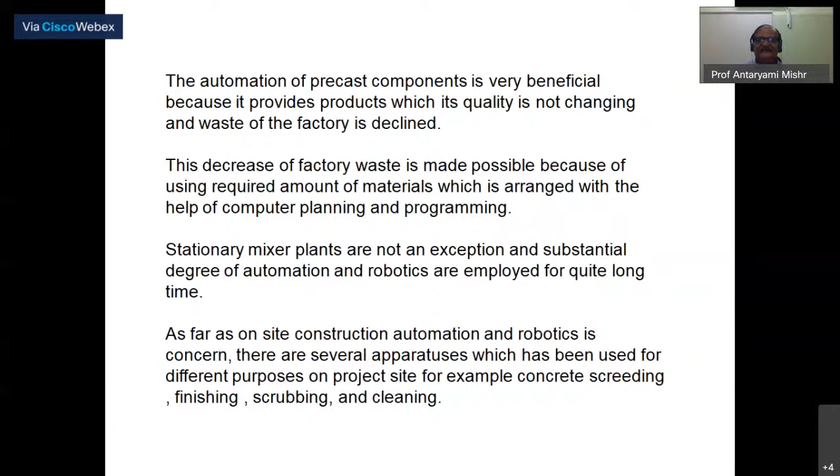Several apparatus are used for different purposes at the project site: concrete screeding, finishing, scrubbing, and cleaning. You see the automatic concrete screeding machine I have shown you here, and this is the surface finishing robot. It will surface nicely - you need not go there, you need not stand there. You can work from remotely located areas.

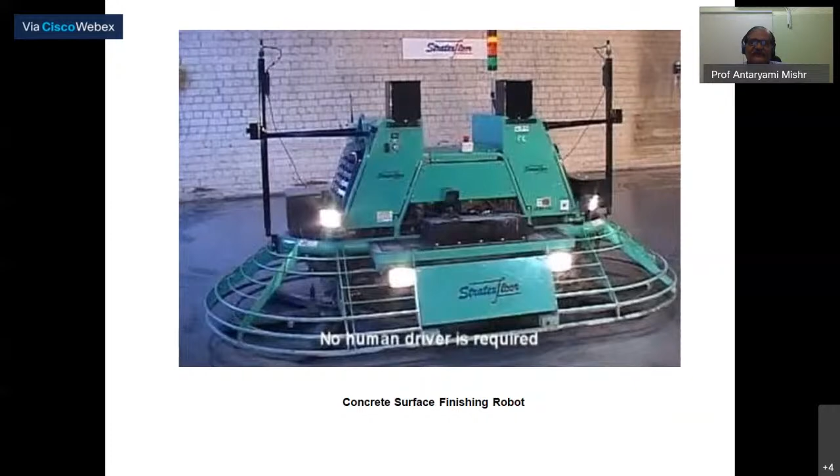And this is high-rise building automation. Cranes are available, canopy is there, climbing equipment and construction lift - these are necessary for automation.

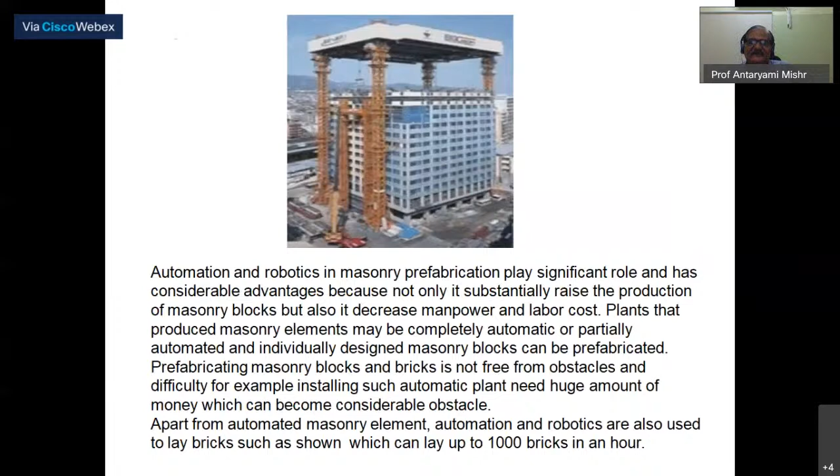Masonry prefabrication work plays a very significant role - it raises the production of masonry blocks and decreases manpower and labor costs. So the use of Hadrian, that I have talked to you about, lays 1000 bricks in an hour, for 150 dwelling houses used for making such skyscrapers. And partial automated masonry element fabrication, that I have shown you here.

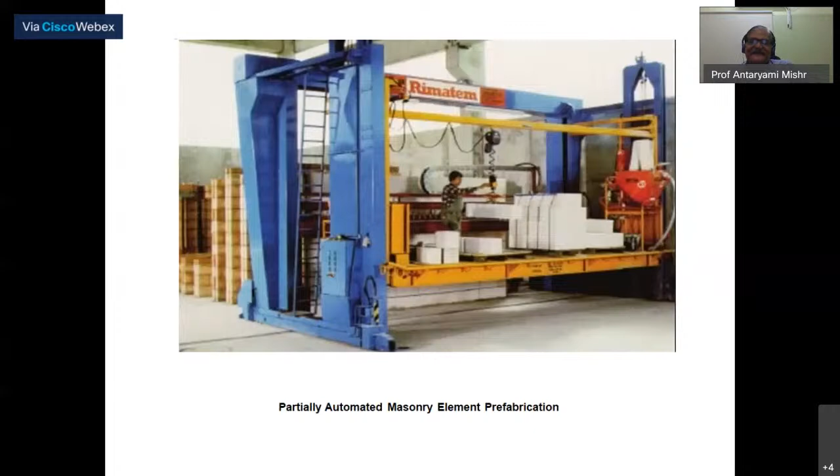I am showing only pictures because all of you are totally tired and not interested to listen to any mathematics or anything. And this is automated manufacture of brick wall masonry blocks.

This is surveyed, put into computer-aided design, and the layout plan has been taken. Now people are not talking about plan and elevation by going for American paper - we were doing it in drawing sheets, American sheets or German sheets. That was a 2D picture, either perspective plan. And now, with computers available, 3D planning is possible.

3D generation is also possible. You can cut a figure, go for a section - no question of full section, half section or quarter section view - and you can tilt the image in any way you like. That is the advantage computers have given us.

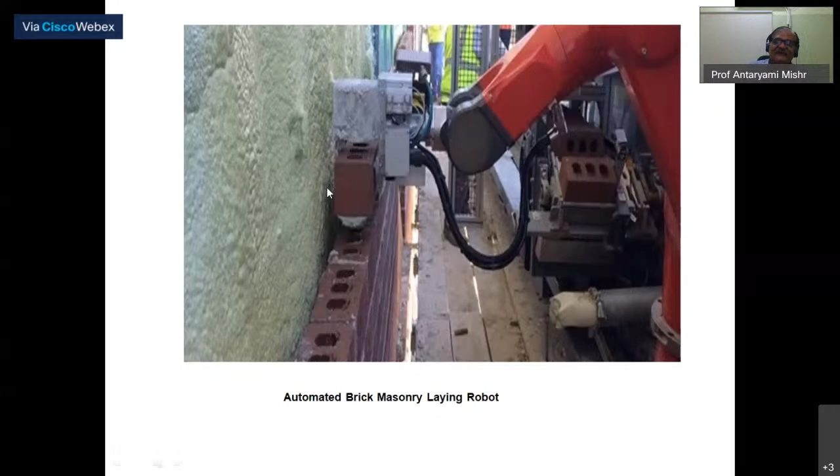And this is the brick masonry robot. You can see how very fast it is positioning the bricks over here. This is a robot. Finally, it is seen from the figures that the machine covers the entire structure, and its cranes are partially automated, prefabricated parts of concrete panels, material storage management.

In the construction site, if it is computerized, the erection of the structure is also partially automated, so that you get good quality of work, durable and at a lower cost.

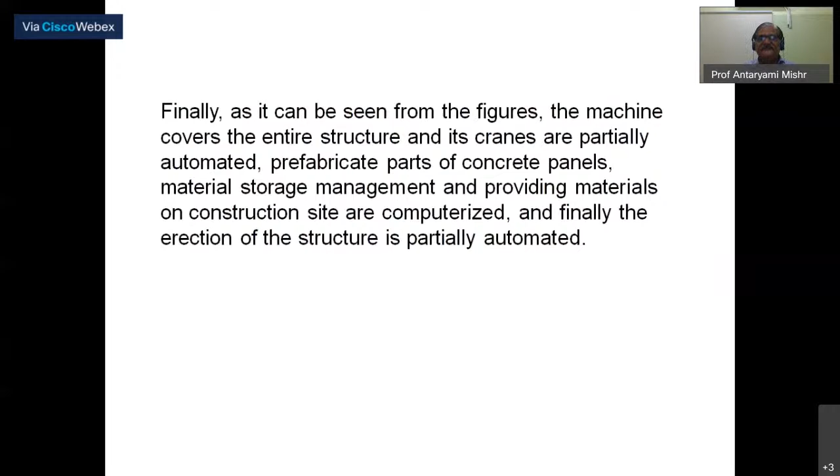Timber construction, fabrication of wood frames - robots are used. Wood processing has shifted from manual processing to complete processing utilizing computer numerical controlled machines. CNC machines are available which will produce prefabricated house components, that I have told you. Tata Housing is doing that for timber as well as for aluminum sheets or corrugated sheets.

That I have shown you in the beginning picture - the main purpose of showing you was that. And you see, multifunctional robotics would add value to it.

Production of steel components, prefabricated steel components, can be done by eliminating the process of manual welding or using bolts and nuts, and while erecting also very huge and heavy parts. The utilization of steel in house construction is very low, but there are factories which prefabricate component houses using automation and robotics.

It is reported that such facility produces 5 to 10,000 houses per year, and it produces 120 square meters in just 2.5 minutes, and the house can be erected in 4 hours. That I have told you already. I have just given you one example, a numerical set of examples which I have collected.

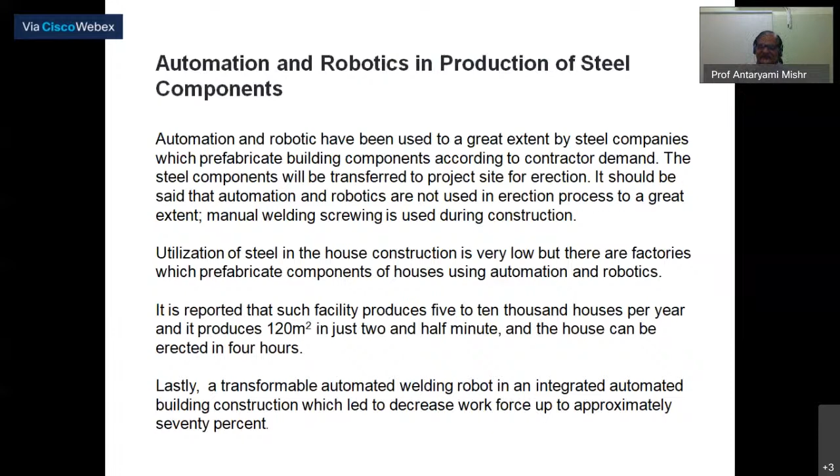A transformable automated welding robot in an integrated automated building construction led to decreased workforce by up to approximately 70%. The problem in India is that whenever we go for automation or a change, we do not quickly accept it. We go for a strike, either state or Bharat bandh, because we will be losing our job. But without losing our job, how best we can give the best output, that is the question as far as India is concerned.

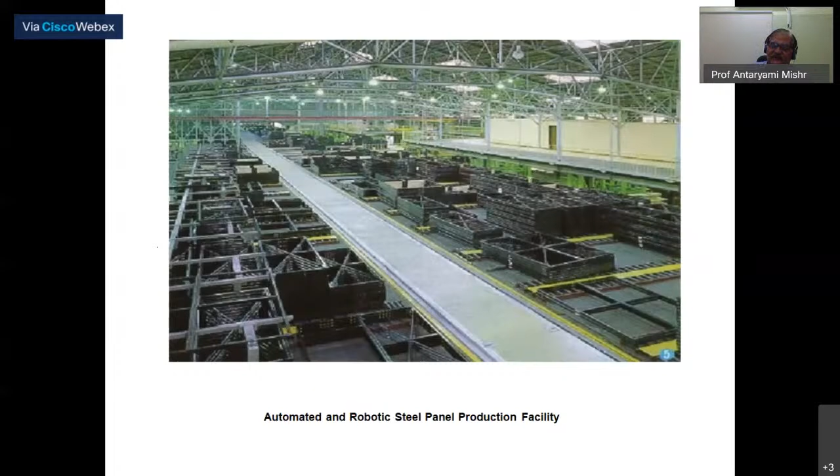Steel panel production facility is totally automated. I am just showing you figures. A welding robot in an integrated automated building construction site - a very small unit, portable, capable of welding, capable of sensing signals if you are using or interlinking IoT type of things, Internet of Things. Those things can be controlled sitting somewhere else.

The conclusion is that implementing automation technology is the need of today's infrastructure projects and construction firms in order to increase productivity and quality of work. Since India has the second largest manpower in the world, automation is not a replacement of human power, but an important supplement. I repeat, don't think it is a replacement of human power, but a supplement that caters to the need of mega construction and fast track construction. These two words are very important: mega construction and fast track construction.

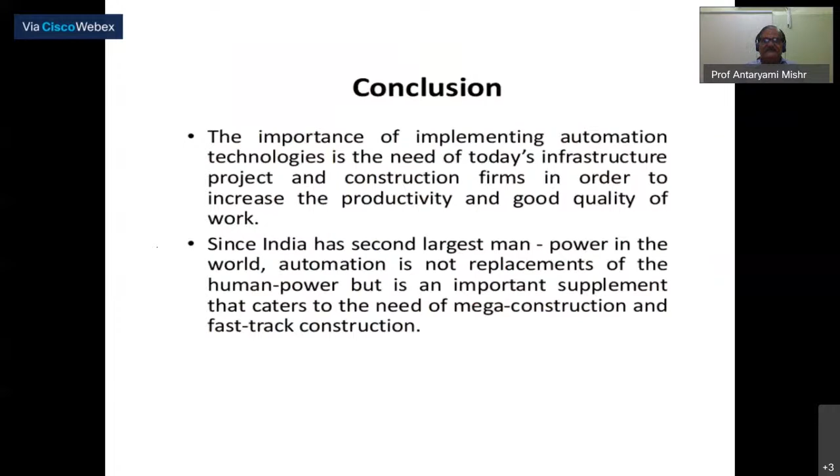The problems associated with construction are decreasing quality of work, labor shortage, safety of labor, and working conditions of projects. These can be overcome by new innovative technologies such as automation, which has the potential to improve the quality, safety and productivity of the construction industry. Today it is evident that the level of automation in construction is very low in comparison with current technological advances.

I am very clear. Do you use virtual reality? Do you use drones for survey? Do you use drones for managing on-site operations? Do you use such types of machinery and robots to do the work at a faster rate? Are we thinking of the safety of labor? Are you thinking of the safety of the environment? No. So we must make efforts to increase the automation level of this important sector, especially the construction sector.

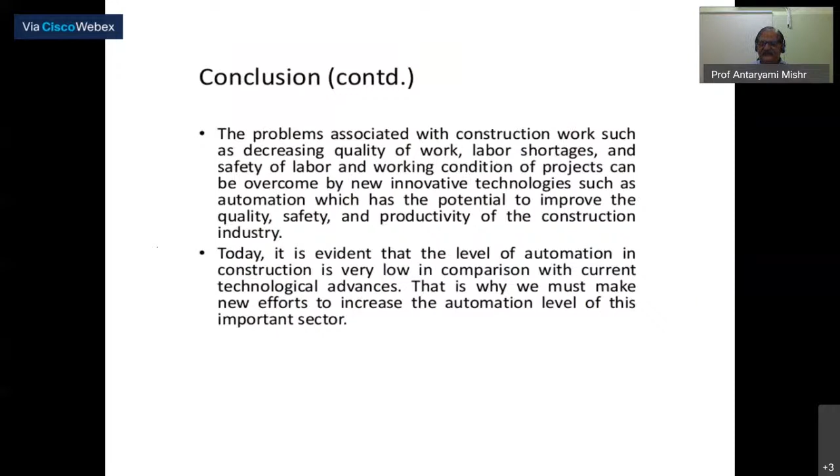It is necessary that economic efforts come from private industry and government to provide funds and resources for research and development of robotics technology. We see India is coming up through technical education quality improvement programs. All technical institutions and faculty members are trained in future skills, with robotics as one part. We are even funding development of robotics laboratories, since I am heading this technology project in the state. That's why at the last I have added this point, but there is certain food for thought.

The food for thought is how extensively we can use artificial intelligence for increasing our efficiency. That means a big amount of data has to be collected from existing constructions and from constructions which have been completed, so that we do not repeat mistakes in future.

3D printing technology has to come in a big way to make a product within a stipulated time, or a very less time, so that product can be used in construction, mechanical applications, or applications in chemical and Internet of Things. Extensive use of Internet of Things is necessary. So data analysis and forecasting techniques are to be taken into consideration, including virtual reality and robotics.